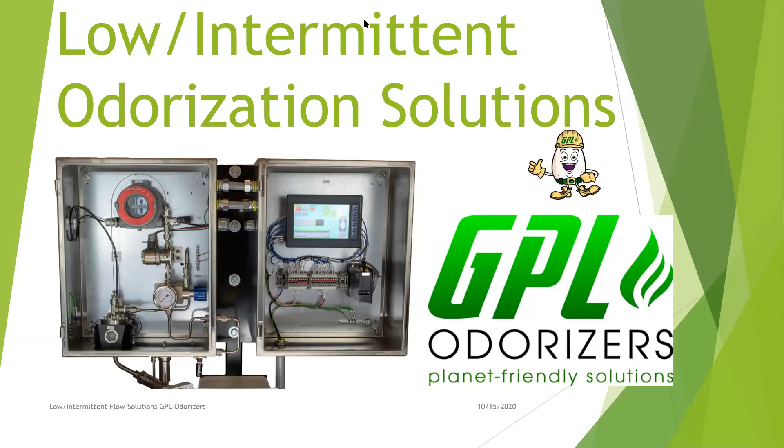And on behalf of CRWall and Foothills Industrial Products, now a CRWall company, and of course GPL Odorizers, we would like to welcome you to our webinar introducing the GPL 750 Odorizer for challenging odorization applications.

Outside of the office, he enjoys spending time with his 3 dogs and recently new wife, Andrea. We've known and worked with Garrett and his family for many years and can attest to his depth of knowledge and passion for this subject, and we're sure you will learn a lot.

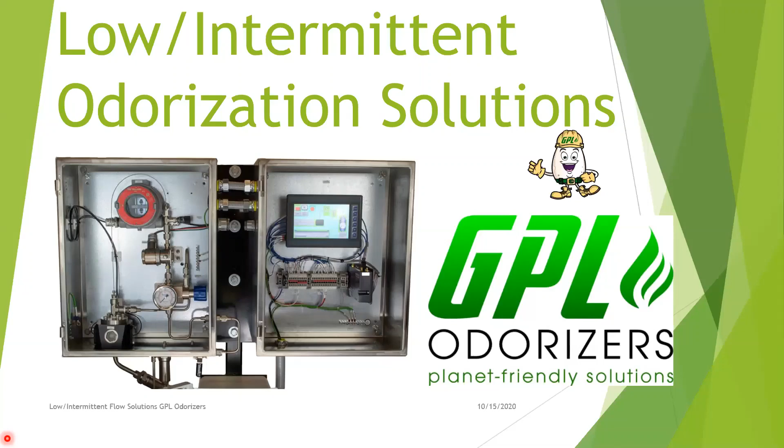So again, where we wanted to take this meeting and really focus our time on is what we've really specialized in the past 6 years that we've owned this odorizer company: taking a real in-depth look at low flow odorization and how do we provide viable solutions, how do we provide robust solutions for what we found to be a very underserved low flow market here.

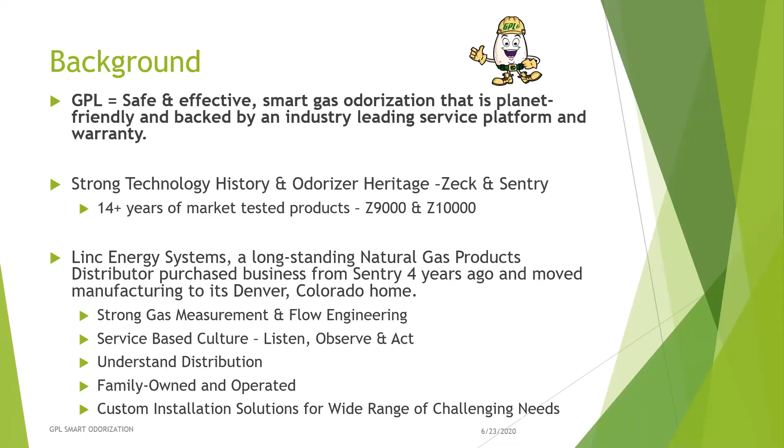From a culture standpoint, we are really a service-based culture. We really want to understand customers' applications and meet their needs. We specialize in custom fabrication, custom coating, anything really to fit into different applications. So we're not going to be a cookie cutter odorization system. We really focus on your challenging applications and exceeding expectations in that realm.

So, a couple benefits of our odorization systems here. The first being, and kind of where we are unique in the market, especially for a lot of the lower flow stations that are using older pneumatic style pumps, is we're going to be planet friendly. So our systems, the GPL 750, is going to be a closed loop system. So we're not going to be emitting any natural gas to atmosphere. We're not going to be emitting any mercaptan to atmosphere.

Our units are designed such that if there is a mercaptan smell in the unit, there is an issue, right? So we've got a closed loop system, and we're not venting anything to atmosphere, which again helps from the environmental standpoint, helps from really a public image standpoint where you're not getting all these leak calls. And again, you're not wasting gas like you would in a pneumatic style pump or anything where you're using actuation gas.

Another thing that we really focus on, and you'll see this in our 750, is we want to be what we call boringly reliable, and we want to be simple for our customers to operate. We understand that there's a lot of different functions for gas operators who are operating odorizers, right? And they may not even touch an odorizer for a month, 2 months. And what we want to bring is a unit that can be familiar to a customer when they get in front of it after they've been trained.

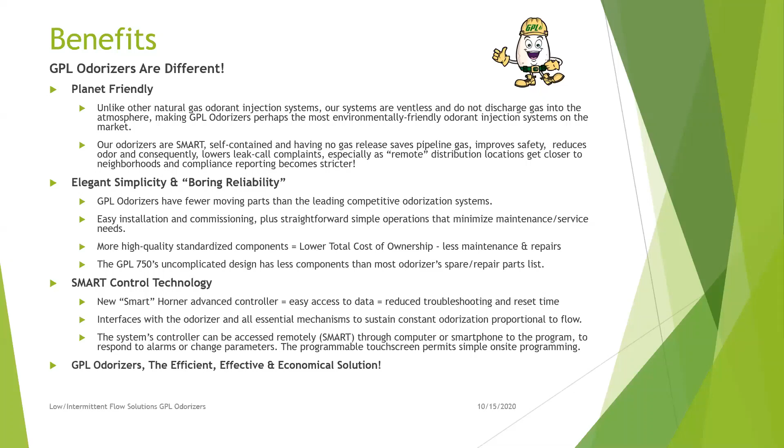So we're going to start out focusing on low flow, our experiences, and a lot of solutions that we've been able to provide customers over the past 6 years in these challenging low flow scenarios. So the first is, what do we classify as low flow? I think every company is going to classify it a little bit differently. But where we really see customers, at least in the States here, calling low flow is 10 MCF an hour, so 10,000 standard cubic feet an hour at any time. And a lot of times these stations will be much lower than that. So we even see 10 as kind of our high mark for low flow.

So we'll see flows as low as 200-300 standard cubic feet, where you've got 2 or 3 customers, and it becomes very, very difficult to odorize these stations because the flows are so low, but you still need to odorize. Where are we finding these stations, right? You've got your small town border stations, so kind of these outlying areas, tail end systems. We've got natural gas expansion, so maybe we're putting in a new station and trying to bring on customers, but in the intermediary time, maybe we only have just a handful of customers.

A big one that we're seeing now more and more, and I know from discussions with the folks at CR Wall, is these renewable methane facilities. So you've got your wastewater, your landfills, and I know that now there's some hydrogen facilities as well in Canada.

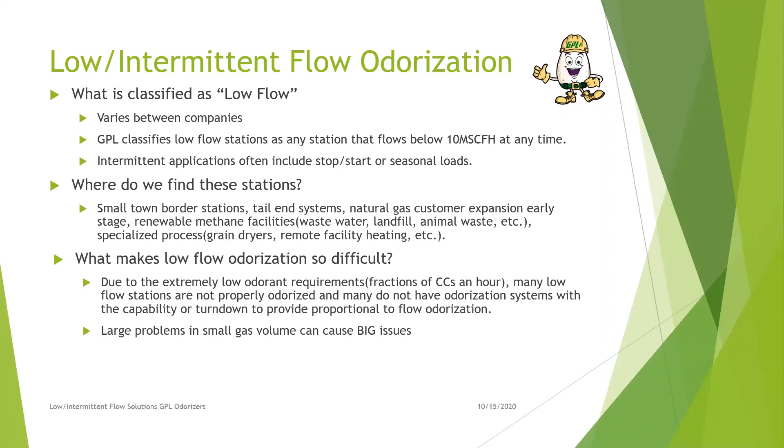So what are we seeing as customers using on these sites, right? So a few different systems that we're seeing: wick odorizers. I'm sure anybody who's dealt with any of these low flow systems, wick odorizers are really the go-to for a very long time. Just got a small odorant vessel, it's got a wick in it, and you're going to install it right onto the pipeline.

The wick is going to draw the liquid up through it and bring the liquid mercaptan right into the flow stream. There's going to be a lot of variance in this from what we've seen. Obviously, temperature has a very big bearing on it. Our gas quality, is it dry, is it wet? If it's dry, it's going to absorb a lot more. If it's got some moisture in it, it's not going to absorb as much.

What blend are we using? What's the evaporation rate on it? What's our flow going through the station? So obviously when we've got more flow, the wick is going to want to introduce more odorant. When we've got low flow, it's going to want to introduce less. And you really don't have a lot of control is what we've found.

So really when we're talking about these wicks, really the only time that we see these now is just at single users, at end of the line systems or tapping off of high pressures for a farm or some outlying area. So we're not seeing these as much at town borders or the larger volume low flow stations, but we do still see those.

Hey, Garrett, we've got a question here. Question reads, what kind of measurement input do you use to make this work? And can you inject odorant with no flow input? Okay, so in terms of measurement, we do have a slide here. So the next couple of slides we will go into that.

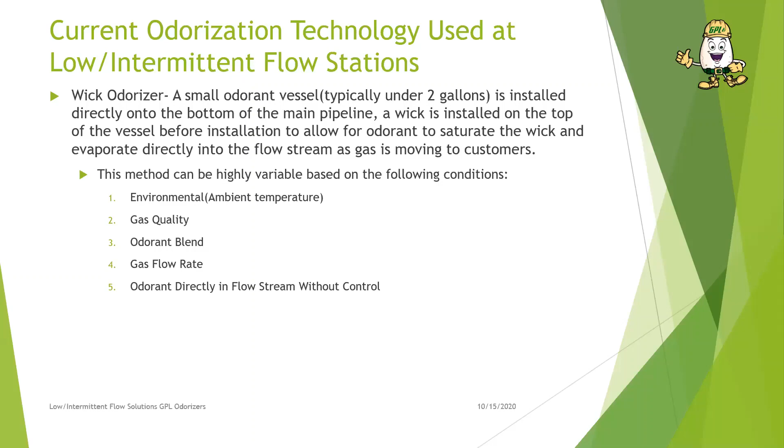So again, we're going to have the same kind of limitations to this. Environmental, is it hot or cold? What's the odorant doing? What's our gas doing? And then what is our needle valve set point, right? We may go out there in the summer and know that we need less gas volume through here because our demand is lower downstream. We can set our needle valve, we can close it a little bit on the inlet side.

Well, if gas flow picks back up, let's say this station in particular, around noontime, there's a couple restaurants down the road and the gas flow probably doubles or triples. Again, we're not talking about a lot of gas flow, but we're talking about doubling and tripling of flow, which means that when we're setting our needle valve on the inlet, we are now under-odorizing versus what we set it in the morning. So there's some variability to this, and we're not really able to go proportional to flow. We're able to set it to what we think may work and give us proper odorization rates downstream, but we can see it fluctuate tremendously here.

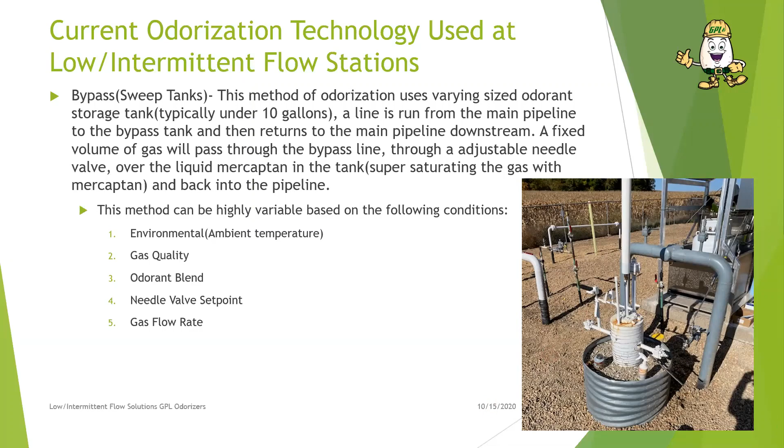There are some other systems out there designed, from the pneumatic side, for lower flow applications, and they've got timers and that sort of thing. But the big thing with these is when we're talking about going to the lower flow, even if we have metering on site, pneumatic pumps have limitations, and pumps in general have limitations. We have a high pressure pump as well, and it has its limitations on the low side. We need to be able to stroke this at a certain interval to keep a prime on the pump and continue to odorize. So what happens typically is there will be a low flow cutoff, and we'll say, well, if it hits a low flow cutoff, we just want it to inject every 5 minutes. If it's injecting every 5 minutes and that flow is fluctuating, we are going to get varying odorization rates downstream. That's where this differential pressure style, the 750, which we'll touch on in a couple slides, really shines, because we don't have to keep that prime on a pump.

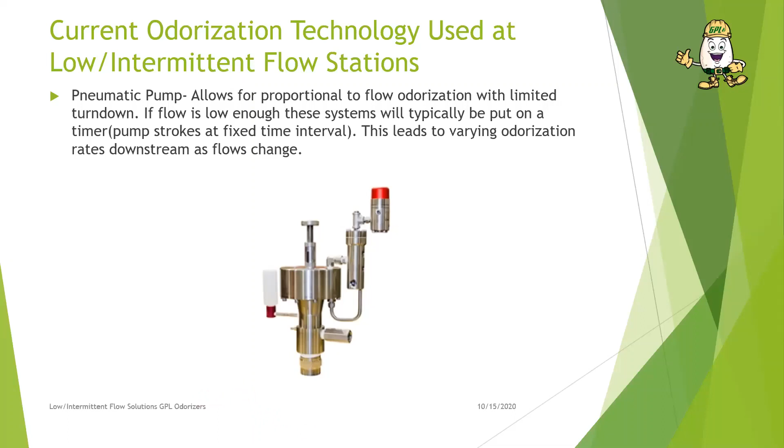So some challenges and some solutions that we've been able to offer customers. Our first challenge is, as that question came in, metering. What are we using for our meter? Well, what we've found is, for the most part, there's two scenarios. Either we have metering out there, and that meter is typically, either we're taking a rotary meter, maybe the rotary meter's got a pulsomatic on it, maybe it's got some sort of electronic index on it, maybe it has a corrector on it, but at the end of the day, what we're getting out of that rotary meter is going to be a pulse.

If we're going off a corrector, it's going to be in a batch. The corrector corrects for pressure and temperature, so if you've got any pressure higher than 7 inches, as soon as you make a full revolution on that corrector, you're going to send out a batch of pulses from a corrected volume perspective. And when we send out these batch-based pulses, we're not getting a true feel for what the flow actually is in the pipeline.

For example, we've got a customer in Illinois at about 300 pounds with some other stuff too. The flow is so low that they only complete one revolution on their corrector in an hour, and then we'll get 100 corrected pulses.

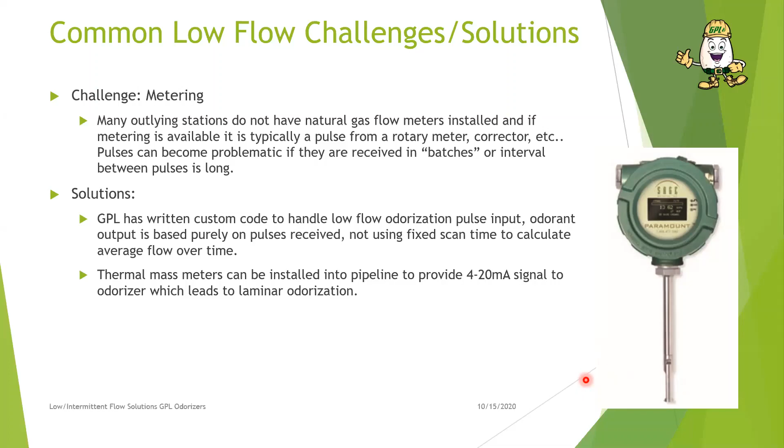So moving forward here, another challenge with these stations is the intermittent flow. The varying flow is an issue as well, but I think intermittent is really the biggest issue. Whether you've got processes where there's enough pipe and low enough flow where you're actually just packing the line, and you'll have times where the pipeline just isn't flowing at all.

And when this happens, if you were using a pneumatic pump, you have two choices. You can try to go off of proportional to flow, and when the flow is running, it'll pick up and it'll odorize. When the flow stops, your pump is going to shut off. Depending on how long it's shut off, it's going to lock up the hydraulics. And again, that's just the nature of pumps, whether it's ours or anybody else's.

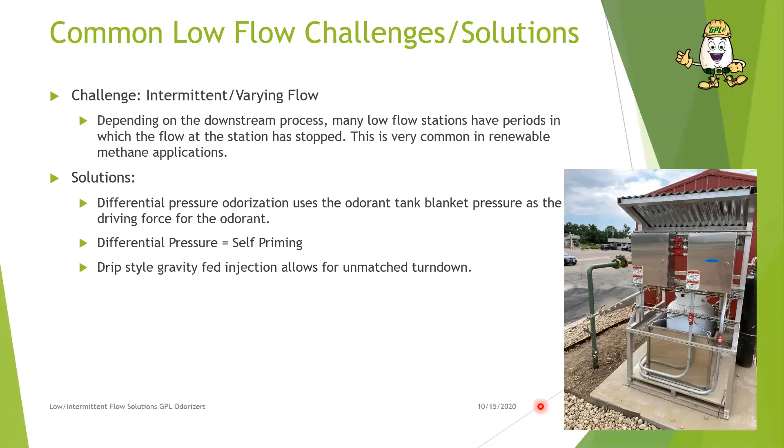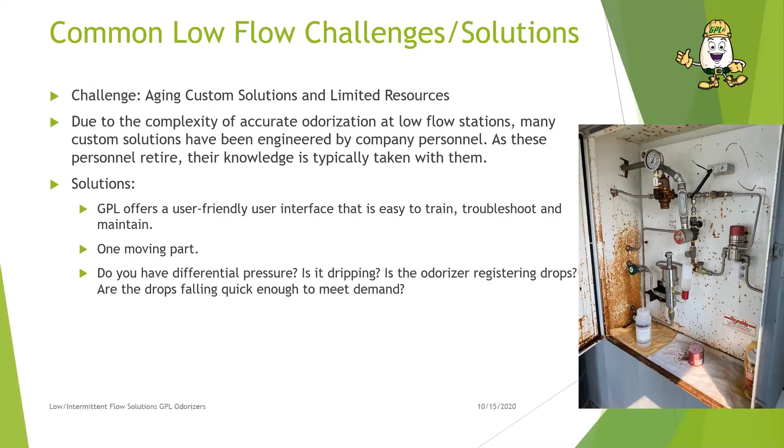So design considerations, again, we wanted to make it simple. We wanted to make it user-friendly. We wanted to be able to log what we are doing, what we're injecting, to actually prove to regulatory agencies, to supervisors, to whoever needs to see what we've injected and what has flowed through our station. We wanted to be able to track that and make it non-volatile so we can move it around very easily. Wanted to take a look at really just making it more cost effective to run the system.

I do see we've got a question here, so I'll stop at this slide here. But we wanted to really use quality components from manufacturers that we trust. So instead of machining our own parts, we use a lot of components from trusted partners.

So Garrett, can I interrupt? I've got a couple of questions for you here. Okay. Yep. Firstly, can the system be wall mounted? Okay, yep, so the system can be wall mounted.

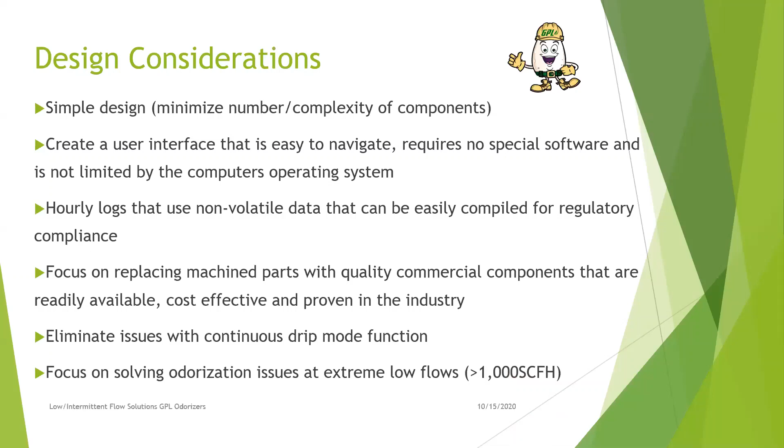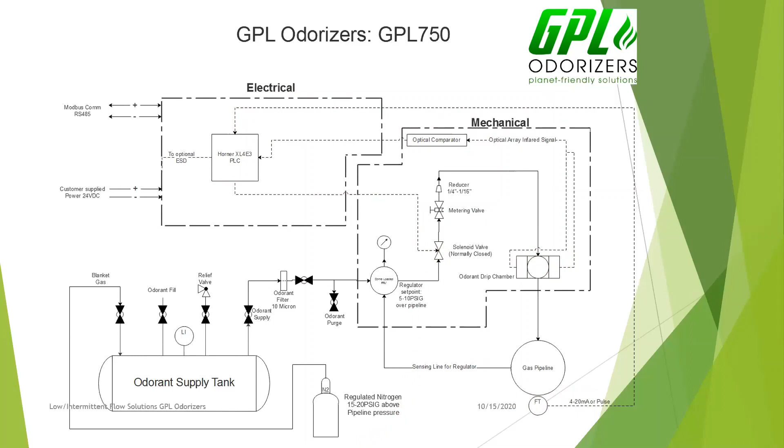Coming down to here, this is what's called our sonic muffler, and all this really is if we do have pipelines where you have high velocities, this will just dampen any kind of noise, any kind of turbulence, so that we're not breaking the drop at the sight glass. On the low flow perspective, it allows for the odorant to pass through here and actually increase the surface area. It's basically just a stainless steel tube with stainless steel wool in it. And as the drop hits that wool, it's going to increase the surface area and increase our absorption.

Coming into the pipeline, we just have an isolation valve where you can lock it here, and then you just have a blowdown valve where we can perform maintenance. So if you ever needed to perform maintenance, you would lock this unit off here. You would insert a nitrogen source to get higher pressure than your tank. You would open up your solenoid and you can blow all the odorant back to the tank, close this valve off, and do any kind of maintenance that you need to do.

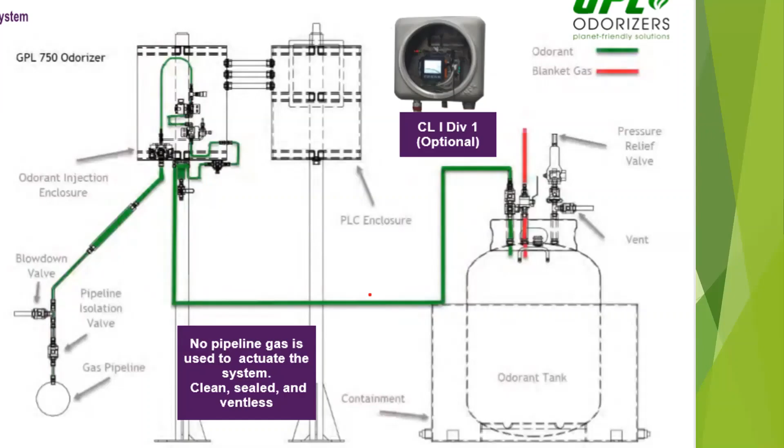Garrett, thank you. We've got another question here. Are there alarms if I have a flow with no drop showing up? Yes, so that's actually perfect segue here. So there are alarms. If you look at our PLC here, it's got full alarm capability. So you've got different alarm set points. You've got low low, you've got low, you've got high, high high, and then you do have a special code for no odorant. So yes, if the odorant rate drops out of program parameters, it will alarm. And it will send out a digital output pulse for an alarm as well. So it does have full alarm handling capabilities, and that can be set as stringent or as loose as deemed necessary by the customer.

So switching gears to components, again, this is our 7-inch style controller. We do have a 4-inch if we were going to do the explosion-proof option, but they are both going to be touchscreen, and they're both going to be all in one. So you've got your interface here. Again, you've got your touchscreen LED display, and then you have all your I/O in the back. So your gas flow coming in, your pulses coming in from your drip counter, and your alarms out are on this side, and your digital outs are on this side.

So again, very capable. What's the low temp rating for this system? So the low temp rating for the PLC is going to be negative 40C, and that does have a CSA cert on it. The mechanicals cabinet, again, we would have to look at. I know that negative 40 is the spec in Canada, but we do offer heaters to meet that spec.

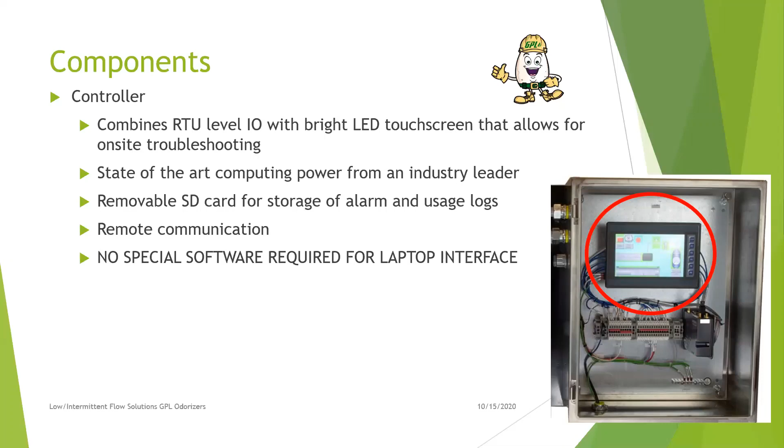Obviously, we need 110% containment of the liquid. And for our smaller stuff, for the 60s and 120 gallons, we do stainless steel containment. And then for our larger containments, we're going to do galvanized steel. And again, we got some pictures at the end that'll show kind of what capabilities and what we've done for customers here.

So just going through our components again, you've got your pressure regulator here. This is a liquid regulator designed specifically for liquid. All the soft goods are PEEK, Teflon, or 316 stainless steel, so we don't need to worry about corrosion from the odorant.

And then you've got your sense line here, which is again going to allow that pipeline pressure to actually load our regulator. So when we're adjusting this reg to our 5 to 10 pounds above pipeline, as pipeline pressure fluctuates, we'll keep that 5 to 10 pounds of spring force on the unit. So that allows everything from here up to be fixed. So you've got your normally closed solenoid here. It's got a little override knob, which we'll go over here in a bit.

Got your metering valve, which again is going to control the speed of our drops for each batch. And then you've got your 16th inch tube that's coming down into our drip chamber. And then you've got your one transmit, one receive from this optical comparator that is looking for a break in that beam to count drops and send them over to the controller.

So the way that this unit odorizes is on a batch function. So when a batch of odorant is called for, so when odorant needs to be delivered to the system, the controller is going to send a signal over to the solenoid, telling the solenoid to turn on. Odorant is going to move through here, and it's going to drop into the pipeline.

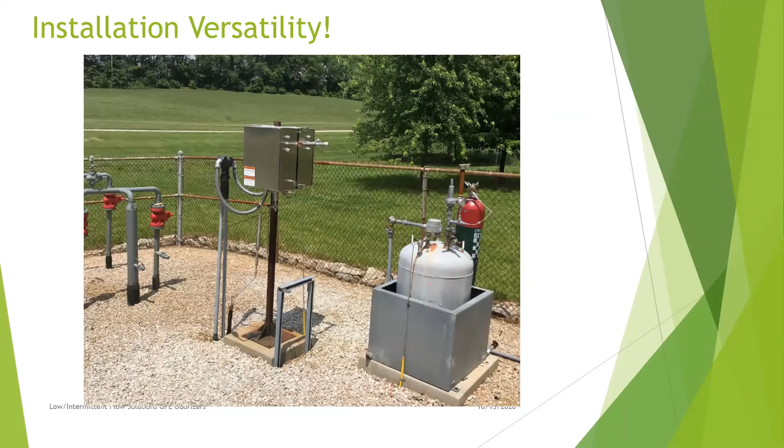So for the person here that asked about what a typical installation would look like. So again, you've got your 2 cabinet system. If we wanted to put it on a post, we can do front to back. Here's our tank here. One's in Indiana. Here's another one in Indiana, kind of a wall mount style. You've got side by side. And here's our injection line here to the pipeline.

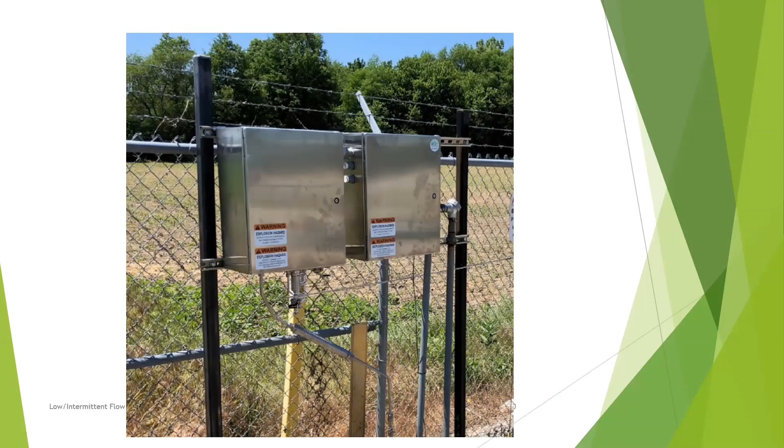We can move them further away. We can go 100 feet if you wanted to between electrical and mechanical. We typically tell customers just to be 25, just because if you're working on it by yourself, running back and forth can become cumbersome. Over here, you've got your electronics enclosure. We've got our power supply here. Over here, we've got our mechanicals that's dropping straight down into the pipeline that's underground. And then you've got your larger tank.

So from a containment perspective, this is going to be one that's obviously not fully enclosed, but we do have 110% containment, and that's going to be 250 gallons. This one is a 500 gallon. So again, picture of our containment. You've got your mechanical enclosure out here, and then you've got your electronics enclosure in the building. If you look here, you've got your solar panel, and they did want the heated display for this one. So their solar panel is larger for this application, but they did put the electronics in the building and the mechanicals outside.

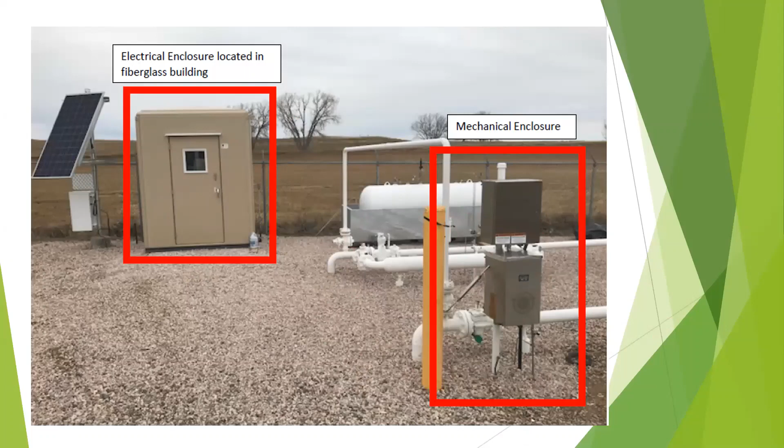So from a security perspective, if we're talking about Class 1 Division 1, it only has one access level, but if you were to go with the larger screen, you would just need a larger explosion-proof enclosure. We do offer 6 customizable access levels for different technicians and supervisors, so people can just see and change what they need to see.

From a remote communication standpoint, any modem that can be set up as a pass-through modem and can interface with an IP device, we can use to interface with this unit over the air. Again, we don't need any special software. We just need a modem, an antenna. We need a static IP address, and I would suggest, obviously up in Canada, I know you guys are very good with the cybersecurity, a VPN, and then you just need that device with internet connectivity, and you're able to log into your unit using that modem as a pass-through, and all you need to do is use a web page to access the unit.

So another question here.

Yes, so the question is, can I interface the controller to an RTU for remote monitoring? So yes, you can interface it to an RTU. There's a couple ways you can do it. You can do standalone remote, right? So you can just run the modem to the unit, and you can interface through a web page over the internet. Or if you want to interface it with an RTU, we do offer Modbus.

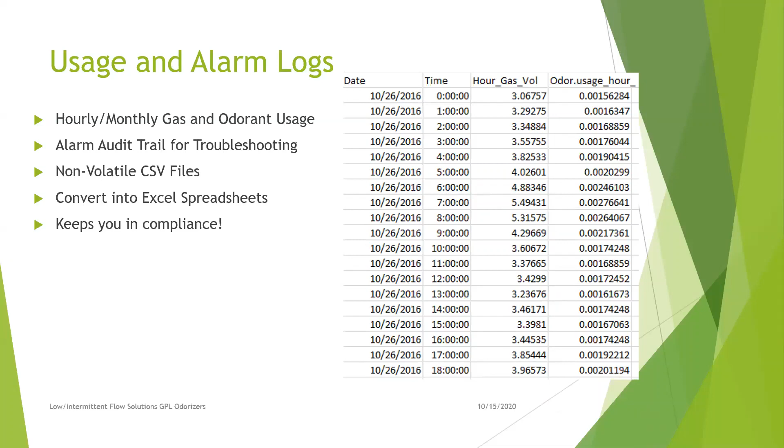So you're still odorizing. Again, we've taken the proportional-to-flow characteristic out of there because we took the control away from it, but you're able to actually dial in your drip if you did need to odorize. You would use your differential pressure on your regulator, and then you would use your needle valve to control that drip in a continuous drip function.

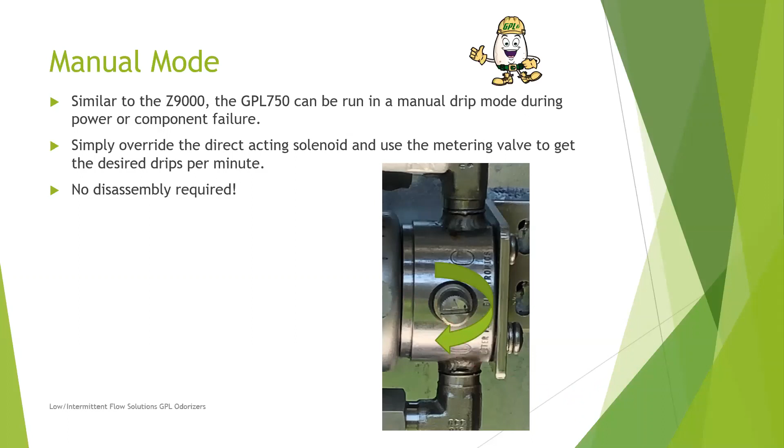So going to our other products, showcasing some of our custom projects that we've done for customers -- there was a question about whether we did fully contained containment systems. So here is a system that's actually fully enclosed with a roof, all aluminum frame. You've got a big double door so you can access all of your valves here. This is, I believe, a 500 gallon, and then you've got your 110% containment down there. This unit is typically what we're seeing a lot at our wastewater facilities and renewable methane applications, because there's a lot of other components to it.

This is actually just our turnkey skid package. So you've got your stainless steel containment -- this is going to be a 60-gallon. This is an aluminum pallet, so you can move it with a forklift very easily. You've got your roof here; the roof is removable if you ever needed to get to the tank. You've got all your pressure control here, your units are mounted here. When the unit ships to you, it would be all tubed, so the only thing that needs to happen is power needs to get run, signals need to get run, we need to get a gas source in, and then we need to go to the pipeline. So it's a very, very easy installation.

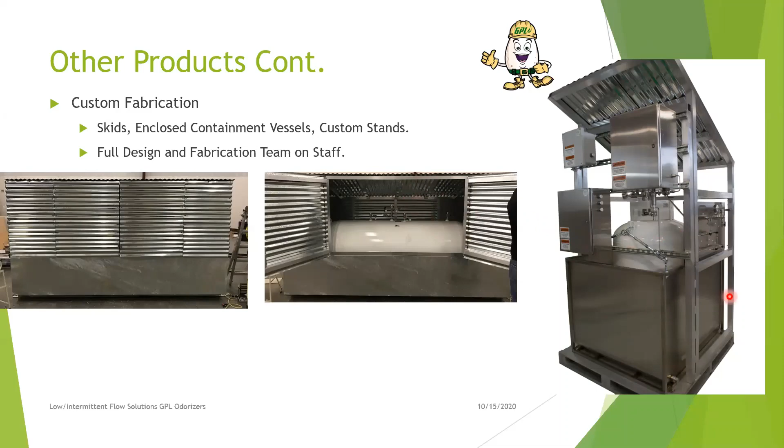And obviously, if you do get water in your containment, you've got your drain plug here, but that's why we've got the roof. Obviously, we understand that it blows sideways, especially up in Canada. That's where we would go fully enclosed and take a look at a custom solution there.